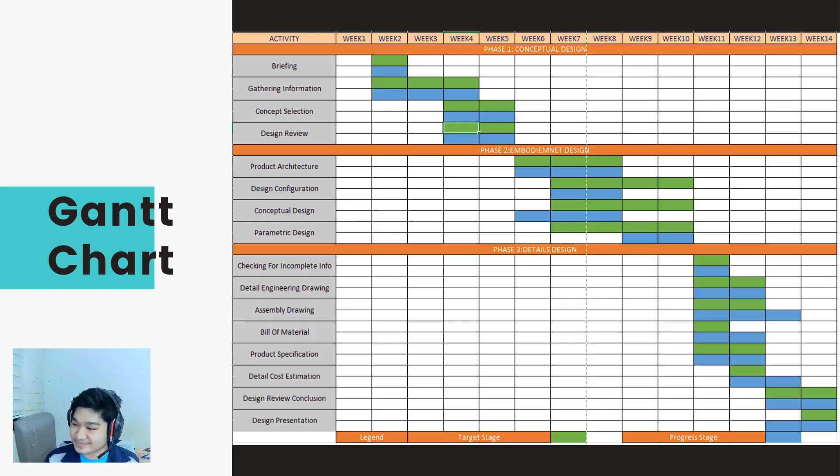First, what is chassis? Chassis refers to a framework of a vehicle. It contains all structure and mechanical components that sustain the body. The chassis offers a robust and solid platform for the body, engine, transmission, and suspension components, which also aids in the equal distribution of weight and stress, enhancing overall handling and stability.

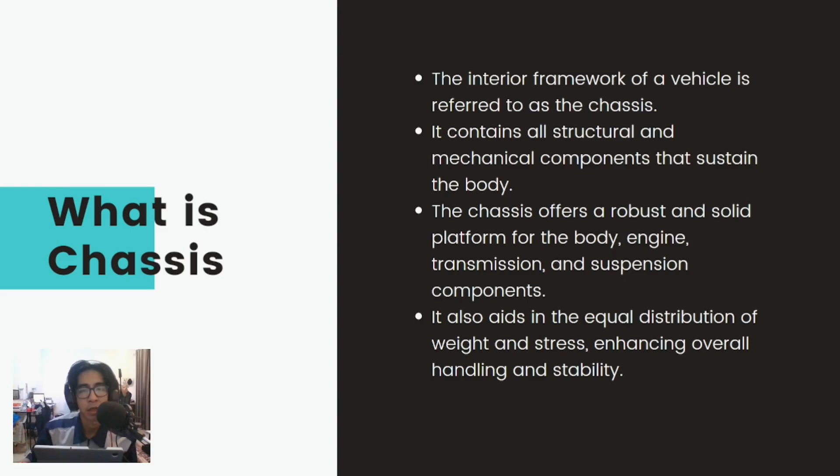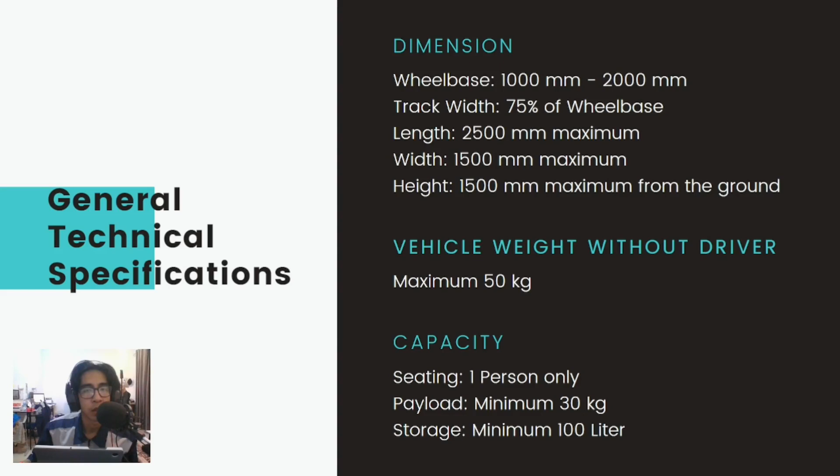For the product requirement, general technical specification for this vehicle is for the dimension. The wheelbase range is 1000 mm to 2000 mm. The track width needs to be 75% of the wheelbase. For the length, the maximum is 2500 mm. For the maximum width is 1500 mm. And for the height, the maximum is 1500 millimeters from the ground.

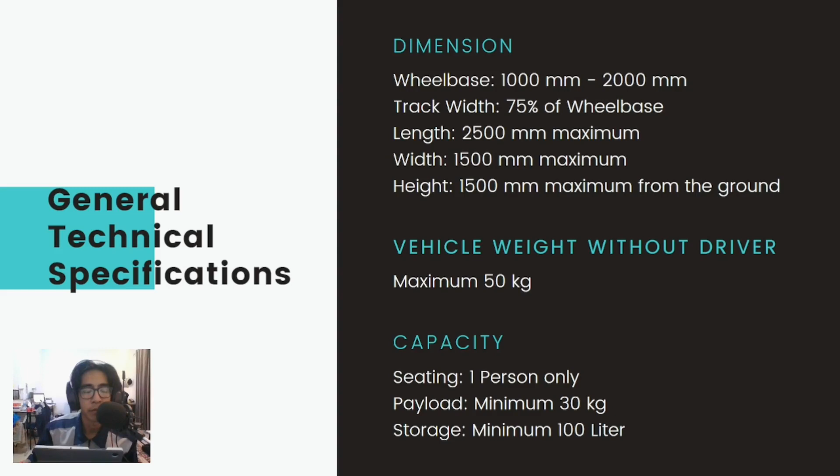For the vehicle weight without the driver, the maximum is 50 kg. The capacity for this vehicle, for the seating, is only for one person. For the payload, the minimum is 30 kg. And for the storage, the minimum is 100 liters.

For the chassis requirement, the type is only space frame, and for the material and shape, the material of the chassis is steel, and the shape is tubing or square section. The roll bar needs to extend 5 cm around the driver's helmet and must also be able to withstand a static load of 700 Newton to make sure the driver is safe. For the driver visibility, the minimum field of vision is 200 degrees.

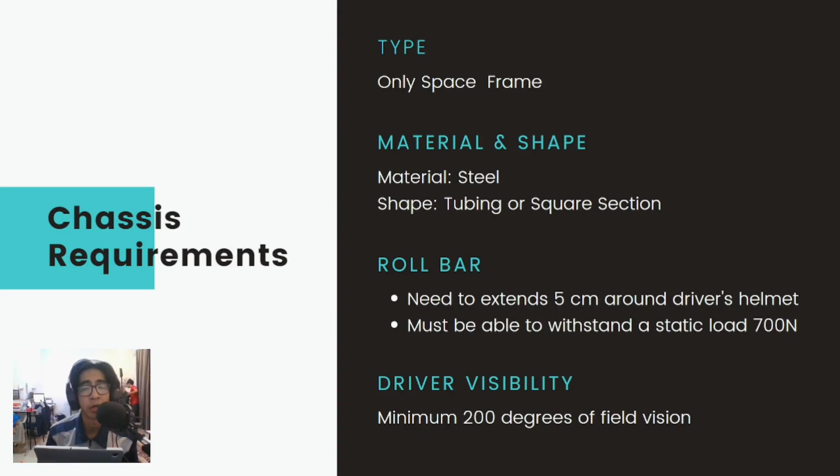For product feasibility study, we use the morphological chart method to determine the best option. The first component is the shape of the tube. We have two options here: the square section and the circular section. We choose the circular section because it has better stress distribution compared to the square section, which means it's stiffer compared to the square.

Next, the component is the position of the wheel. For this component, we discussed with the steering department whether they want 3 wheels or 4 wheels. So we chose 4 wheels, 2 wheels at front and 2 wheels at back.

And next is the shape of chassis. At first, we wanted to choose the aerodynamic chassis, but we have a problem, which is that the driver will not have enough space to pedal the car. So we decided to go with the box option so that the driver has more space to pedal.

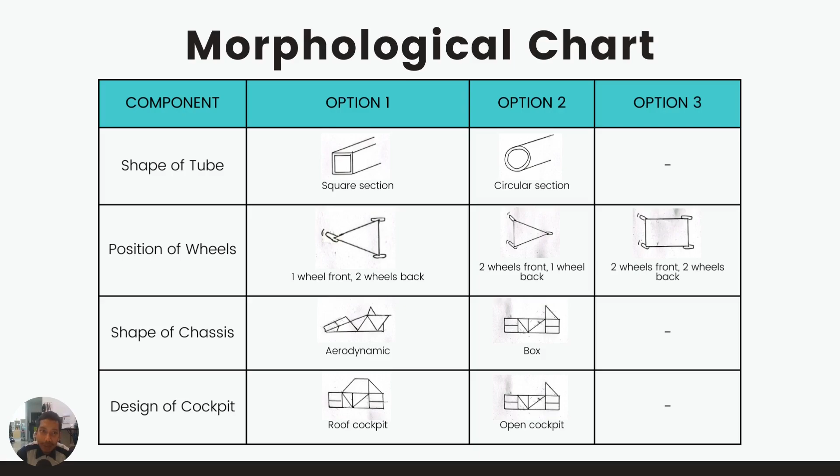And from this is our final design. This is our design. As you can see, we have all the components. We applied all the components from the morphological chart into our design.

At first, you can see the shape of the tube. We use a circular section. For the position of wheels, we have 4 wheels, two at front, two at back. And it is a box shape to have more space for the driver.

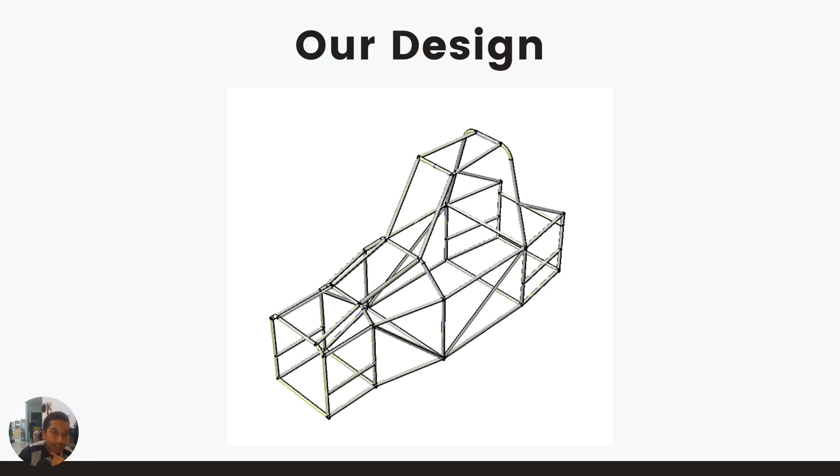And we have the design of the cockpit. We have a roof on top so that it is more buggy-like, and also for safety reasons in case of a crash impact. I think that's all from me. Thank you.

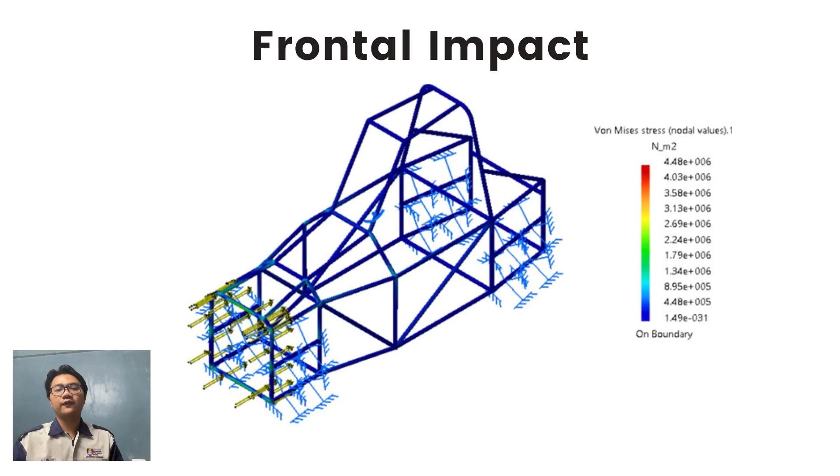And then the next step is we apply the force in front, on the front of the chassis. And then we get the von Mises stress maximum, which is 4.48 meganewton per meter square. And then from that, we find the safety factor of the chassis, and the value that we get is 44,642.9. Next analysis that we have made is the roll bar crash impact.

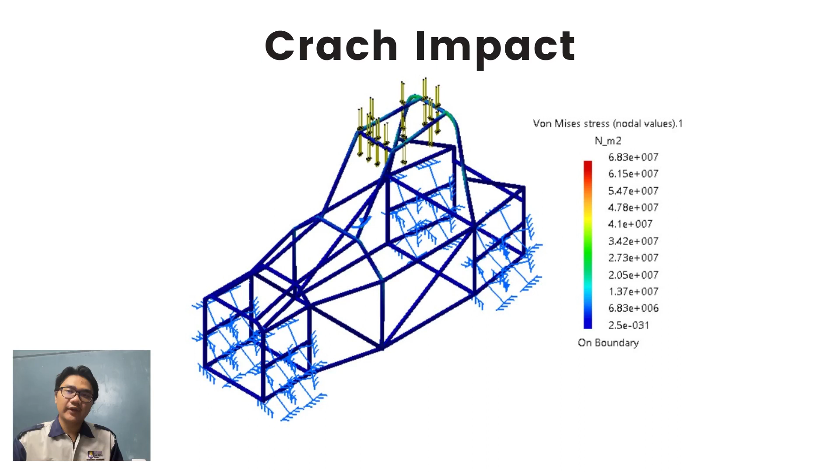First of all, we have to find the value of force acted on the roll bar, which is 700 Newton. And then from the force, we get the von Mises stress maximum, which is 68.3 meganewton per meter square. And from that, we substitute the value into the factor of safety formula to find the safety factor, and we get about 2,928.3.

Next, I will explain how we find the estimation cost. Firstly, we list all the materials that we are going to use, including the raw material and the tool material, and also the electricity that we use.

So in total there are 4 items, which is the material we use, mild steel, and the tool material, which is MIG wire welding, and also the MIG gas welding, which is CO2, and of course electricity that we use. The price of those materials is RM4 per kg for mild steel, RM6 per kg for the MIG wire welding, and 27 ringgit per liter of CO2 gas.

And then the quantity of materials that we are going to use is 40 kilograms of mild steel, 15 kilograms of MIG wire welding, and 10 liters of CO2 gas. And then the total that we calculate is...

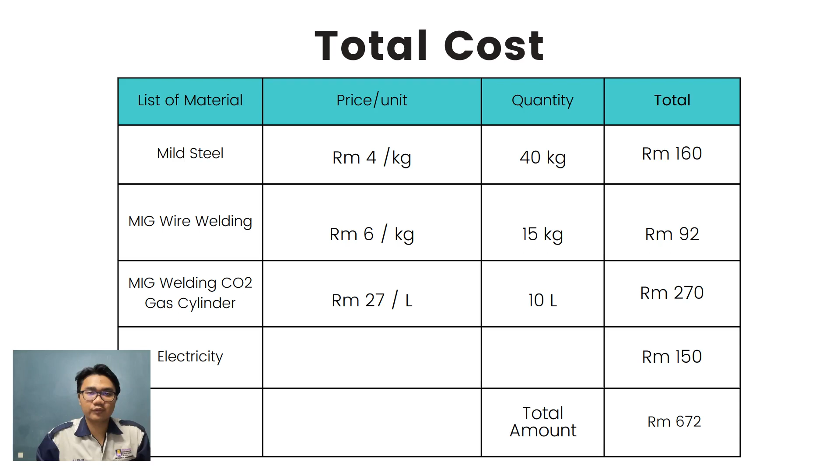For the mild steel, we are going to use about 160 ringgit. For the MIG wire welding, we are going to use about 92 ringgit. And then for the gas, we assume that we are going to use about 270 ringgit. And for the electricity, it's about 150 ringgit. So by adding all of that cost together, we get the estimation cost, which is 672 ringgit total. That's all from me. Thank you very much.